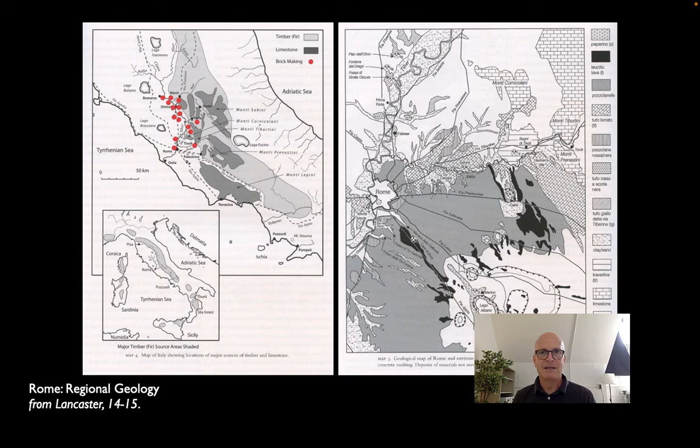It was one of the ways that aristocratic families could actually make money, and so brickwork in major public monuments was both a sort of good thing for the citizens of Rome, but an even better thing for the owners of these massive brickyards.

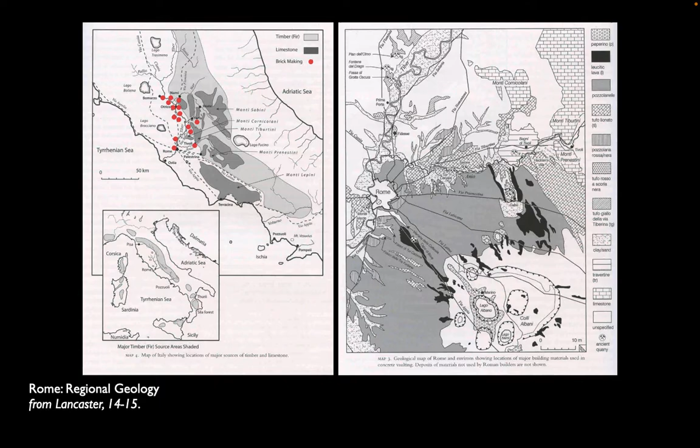We had looked at the kind of library of stone that Roman builders had and talked about it in terms of its relative strength and workability. So the local travertine, very, very good compressive strength, but very workable. And Roman builders in later years, of course, had access to granite and basalt from both Egypt and the Italian peninsula that was much, much stronger, right up to 3,000 kilograms per square centimeter, but very, very hard to work.

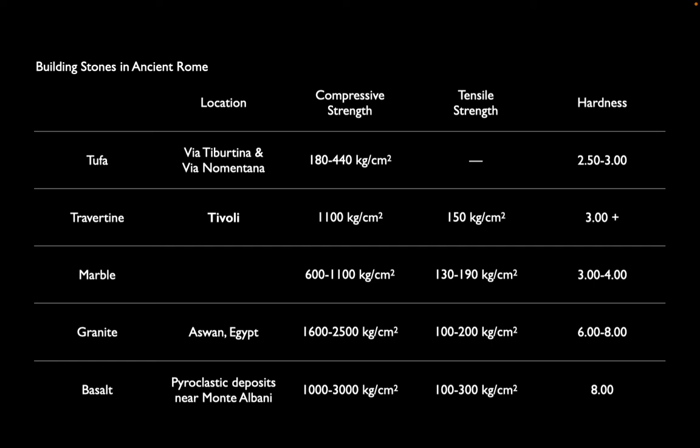When we make brick, on the other hand, we end up with a much softer material and a much weaker material, but one that's much easier to shape to the tasks that we want it to achieve. So we'll look at two types of brick, mud brick and fired brick. And as you can see, there's a huge difference in compressive strength. And tensile strength, even at its best, brick has very little reliable tensile strength as well.

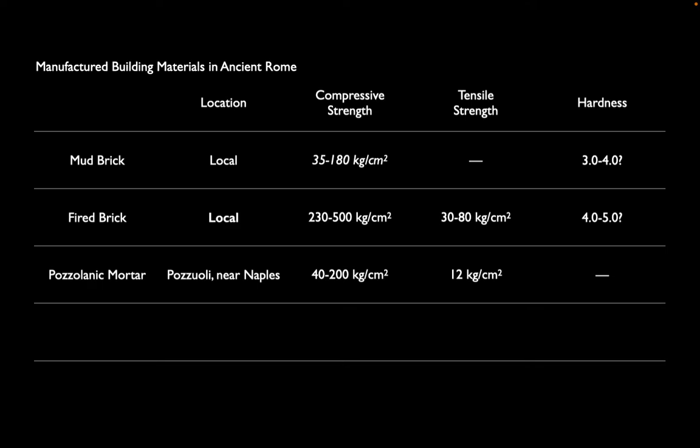Mud brick has characteristics that give buildings built with it very, very obvious, distinct sizes and proportions. It, like the material it's made out of, is very subject to deterioration when it hits water. So even though it is sun-dried, the material is not that much more resistant to being washed away or dissolved than the actual clay is.

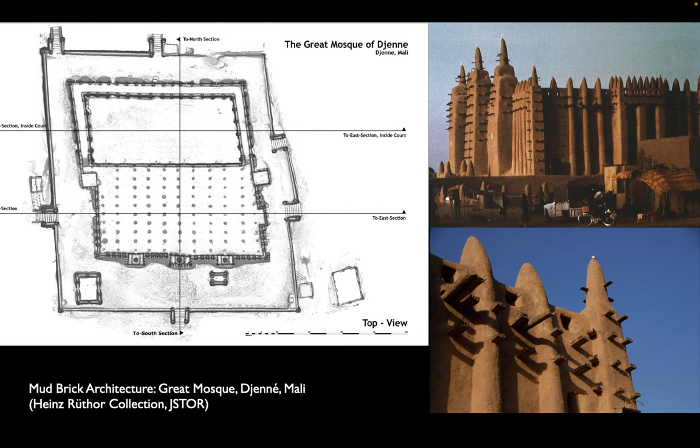This building has a particularly interesting history. The original mosque was the subject of a theological dispute. A local leader decided that it represented a sort of decadence that he and his followers didn't approve of. So he wanted to destroy it, but couldn't be seen to sort of actively demolish a sacred building.

So what he did was he ordered the gutters to be blocked up, and the rainwater, instead of cascading off the building, built up on the roof, soaked into the walls and destroyed the building on its own eventually. The mosque was rebuilt at the beginning of the 20th century.

It was controversial because the reconstruction was led by French colonialists who included forms and symmetries, as you can see here, that weren't necessarily part of the local tradition. But they relied on local labor and local craftsmen to make the bricks and to actually assemble them into walls, and that is still done today, that there are still craftsmen who work pretty much full-time on maintaining and keeping up the building itself.

And so this is another example, as we were looking at the example of the Ise shrine when we were talking about timber, of the shortcomings of the material translating into an important element of the local culture, where the process of rebuilding and maintaining is an important ritual to the surrounding city and the surrounding region. And what we might think of as a weakness in the material structurally is actually a sort of strength socioculturally.

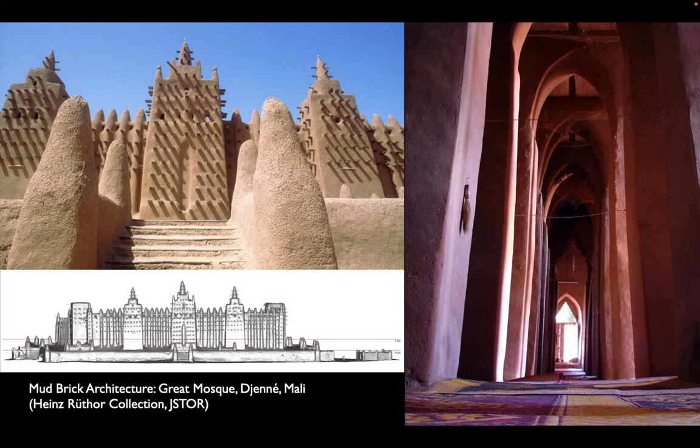Mud brick is not very strong on its own, and so when we see walls built of it, we often see things that we recognize as reinforcement being added into it. So in Egyptian bricklaying, a mud brick building culture, we see mortar being used that is pretty much the same formula as the bricks themselves, so relatively weak, but strengthened, as you can see, with layers of grass that again provide a sort of rudimentary tensile reinforcement that gives the walls just a little bit of bending strength.

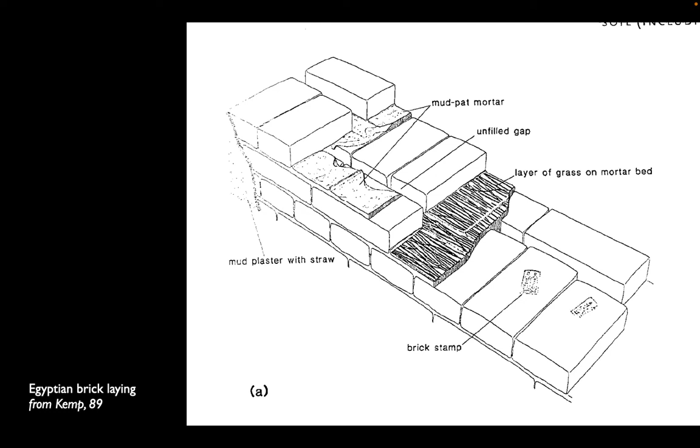And here too you can see over on the left that Egyptian brick was always clad with mud plaster or stucco, again reinforced with straw or grass to give it a little bit of robust tensile capacity. Now, if we go kind of up the ladder

one level of strength, we find another type of brick that the Romans really perfected in their imperial building culture in particular, and that is kiln-fired brick, where you use the same process to shape the bricks with wet clay, but instead of allowing the clay to dry slowly in the sun, you put it in a kiln that very rapidly, or comparatively rapidly, really burns off all of the water in the clay and gives you that additional strength, roughly twice the strength of mud brick.

At its simplest, an open-air kiln simply puts the wet clay in the center of a mound of flammable timber and sticks, the mound is burned and the clay is subject directly to the heat of the fire.

The Romans and other brick-making cultures have figured out that if you have what's called a vertical kiln, where you separate the combustion chamber where the fuel is from the firing chamber where the brick goes, you get a slightly more consistent firing of the brick, and you do not get the kind of smoke, discoloration, and things that you would get in an open-air kiln. So we see evidence throughout the Roman world of kilns being used to produce bricks.

And the Romans knew that in a firing chamber, the bricks that were closest to the combustion chamber would be stronger, but also harder to work. The bricks that were at the top of the firing chamber would be softer but weaker. And there's evidence that brickmakers marketed basically the different types of bricks according to where they had been in the firing chamber.

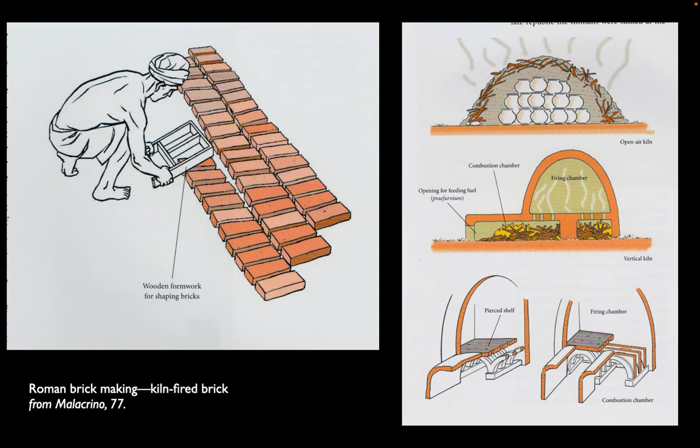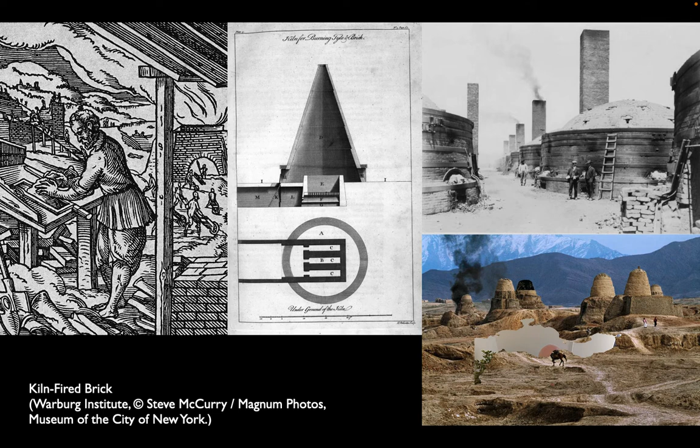Roman brick was standardized. The standard Roman whole brick was about 30 centimeters by 30 centimeters, so a little bit more than a contemporary foot by a contemporary foot. And for most building, it was divided in half, either along its axis to create a rectangular brick that we would recognize today, slightly longer in proportion than the 4-inch by 8-inch brick that we're used to seeing, or it would be divided in half along the diagonal, creating two sort of sandwich shapes. And as we'll see, this had a particular use in a very special type of wall itself.

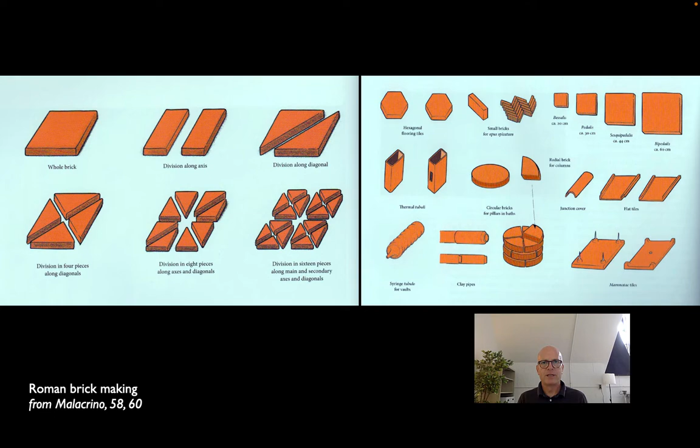And you can see that's a very difficult shape to mold, but terracotta is light enough that the clay can be wrapped around the mold and fired successfully in a kiln. So a tremendous variation in sizes and shapes, but also a standardization of the typical structural brick that would be used throughout the empire. Now, brick, of course, has to be sort of glued together, and to do that, there are a couple of different types of mortar that the Romans used.

The simplest was lime mortar, where they would simply take limestone, crush it, fire it so that it would remove most of the carbon, and then wet it. And when wet, slaked lime begins a chemical reaction. It first creates calcium hydroxide. The calcium in the lime bonds with oxygen in the air. And then over time, long periods of time, it continues to react with the carbon dioxide in the atmosphere. And eventually that calcium hydroxide becomes calcium carbonate, essentially limestone reconstituted. So this is literally artificial stone.

Lime mortar, relatively easy to make if you have access to good limestone, but it is non-hydraulic, which means that it needs to be in a perfectly dry condition to actually set. This is problematic, of course, if you're building in a rainy climate. You can protect the wall while the mortar is setting, but it takes a long time to come up to strength, so it's very difficult to build multiple stories with lime mortar.

Being in a volcanic region, though, Roman builders also had access to what was called pozzolan, which was a volcanic ash that had a much more complex chemical reaction when it was wet, and could be used even underwater, would set even if it was completely surrounded by water. So Romans used pozzolanic cement to build breakwaters, to build harbors, but it was also used in building construction because it had other advantages. In addition to being able to build in wet conditions, it set much quicker, which allowed for faster multi-story construction, and it came to its ultimate strength much more quickly than lime mortar.

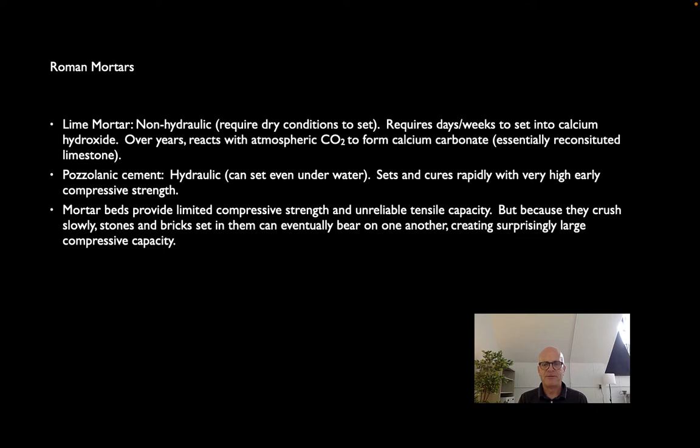Now, mortar is almost invariably weaker than the brick or stone that it's holding together, but as it fails or crushes, those bricks or stones either come to rest on stronger elements within the mortar itself or on each other. And so as the mortar sort of crushes and the wall settles, it finds the most effective load path for each brick within the wall. So while holding it together, it's also allowing the wall to kind of settle itself. Now, Romans used mortar in much greater proportions than we're used to using today.

When we look at a Roman brick wall, we see these, what to us feel like very chunky beds of mortar in which the brick is laid. And that sort of makes sense, that mortar was easier to come by in some ways than brick, and much in the same way that we use aggregate in concrete today to sort of take up space, to stretch the expensive cement farther. Roman bricks and walls can be seen almost as a kind of man-made aggregate that's used to extend the reach of the mortar itself.